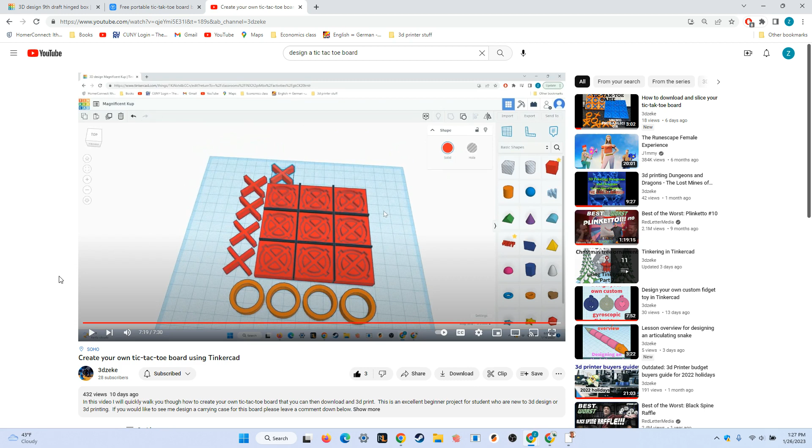Today I will be walking you through the design choices I made when designing my portable tic-tac-toe board. Unlike my first video, which was a step-by-step tutorial, this video will be more of an overview so that you can use it for your own purposes, but will still leave you with a challenge. With that said, let's get right into it.

The first thing that I did when designing this board was to simply remove 2mm from the bottom. This was to reduce the printing time as well as to save a bit of material.

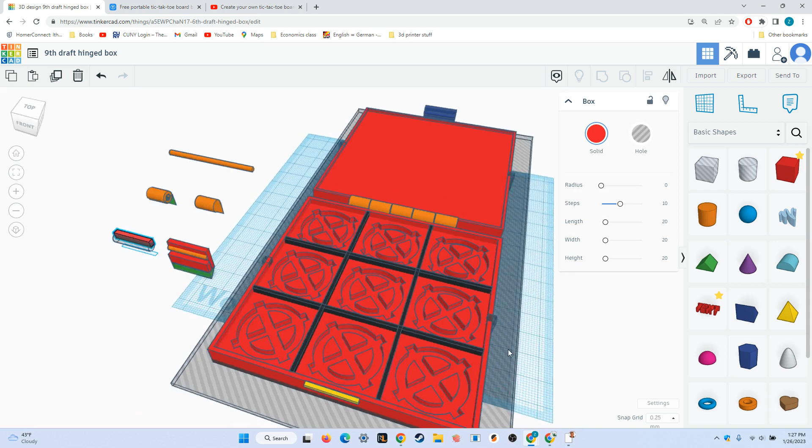After that, I added a lip to this box so that all the pieces would be held in place when the box was closed. This lip is also mirrored on the lid of the box. I also recessed the lid of the box a little bit, because the pieces jutted out of the bottom a little bit, and this was to give them room to do so.

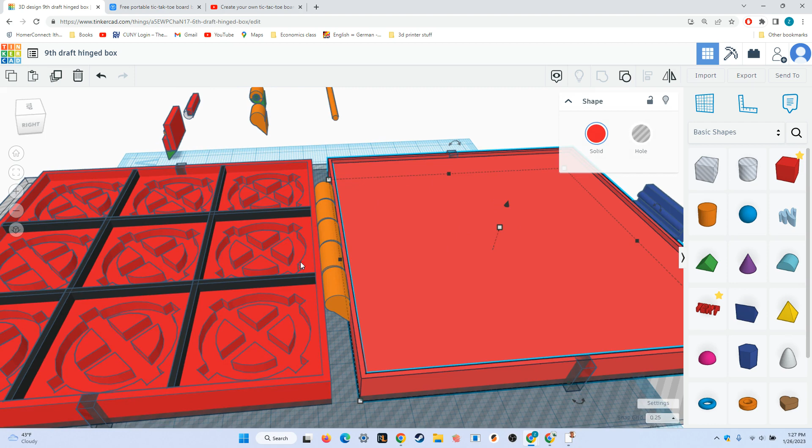After that, I began designing the hinges that the box would fold on. If I hide this hinge, you can see that some of these hinges are hollow, while other ones are solid. Both of these were designed very similarly, and if we go over here, we can take a look at how I made them and the basic shapes that make them up.

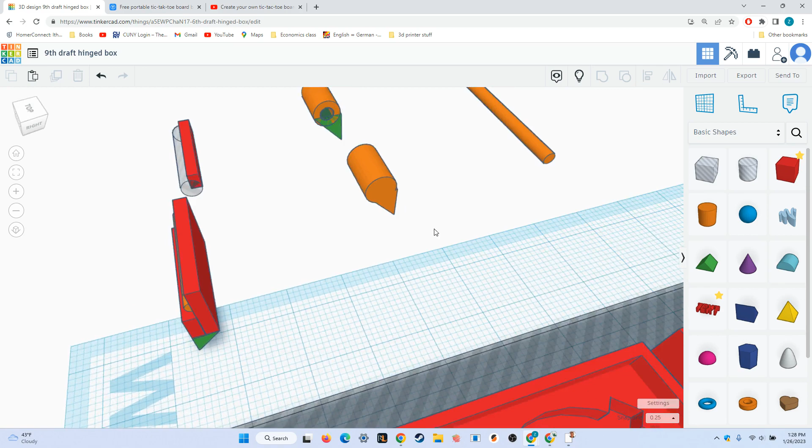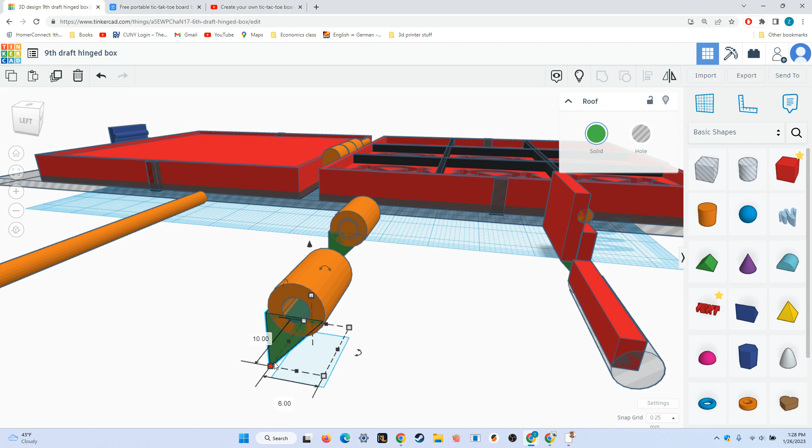So here we have the two leaves that I used when making my box, and the first thing I did was start off with a roof shape that I rotated. This was because I wanted this model to be printed in place, and this roof allows me to not have any overhangs that would complicate the print.

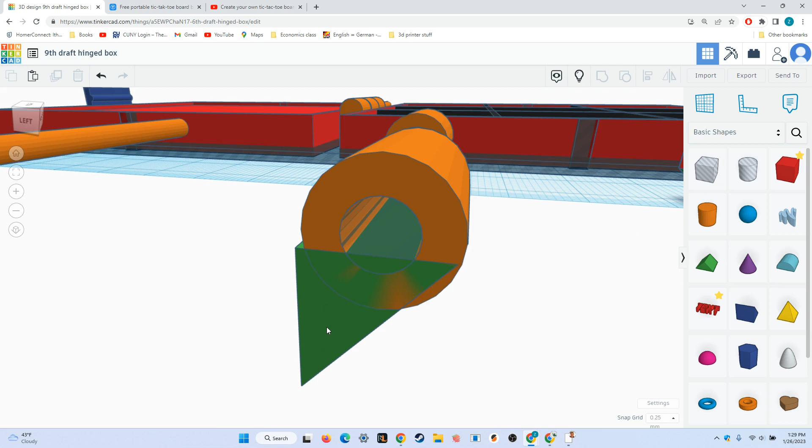The next shape that I dragged in was a tube, and the measurements I used for this were a radius of 3 and a wall thickness of 1.5. So from end to end it's 6mm in diameter, but the hollow tube in the middle has a diameter of 3. Now you can see that the roof and the tube overlap a little bit.

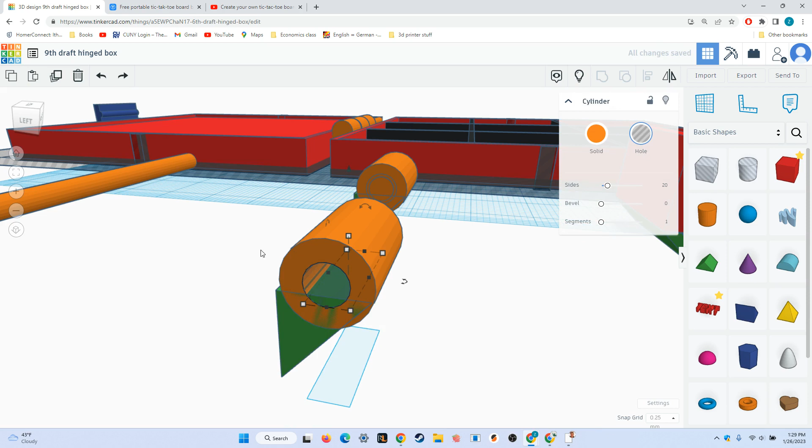This would be a problem as it would connect with the pin and prevent it from rotating. In order to solve this, I simply used a cylinder that I set to be a hole, with a diameter of 3, that fits right in the center. When I group them all together, we get the hollow leaf.

The other leaf that I used for this box was solid, and I accomplished this with these same shapes, but the cylinder wasn't a hole in the middle. I also made it a little bit larger because I could really.

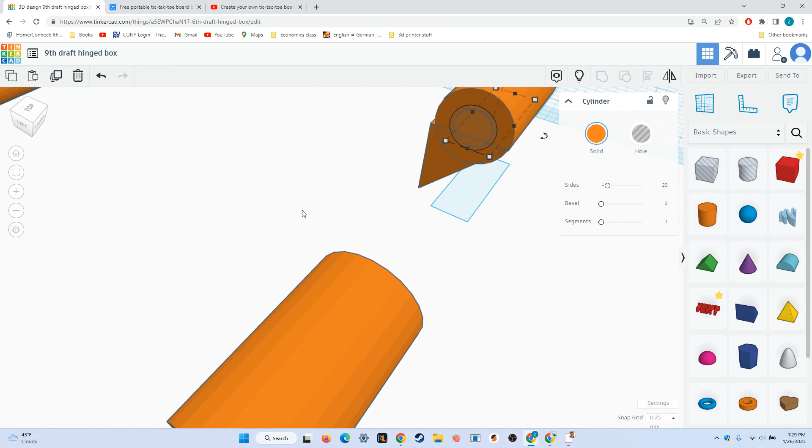The pin is over here, and as I said, the inner diameter of these leaves is 3mm, so the diameter of this pin is 2.4, so that there is room for it to rotate around, and the printer does not have to worry about too close of tolerances.

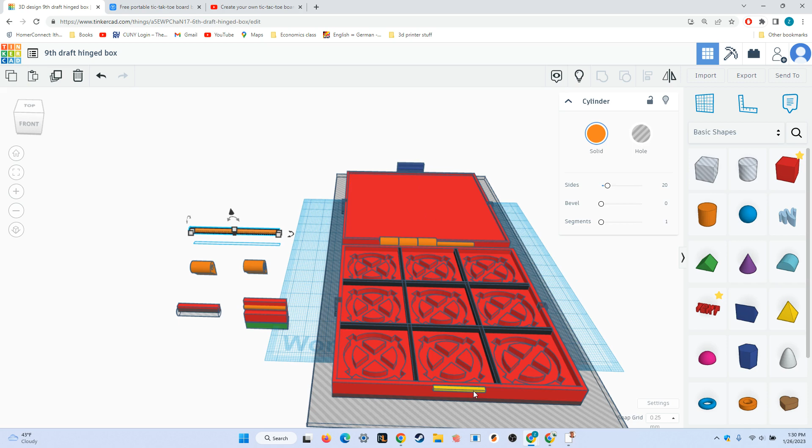The last pieces that I designed, and that took me the longest time to perfect, were this blue and yellow latch and lock. Once again, over here I have the basic pieces copied and pasted so you can see how I made them. To make the lock, I simply used a cylinder which I set to be a hole, as well as a box.

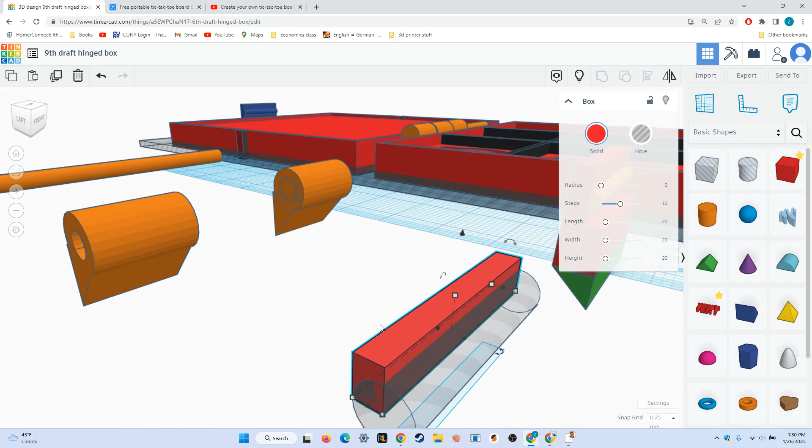On the other side we have a smaller cylinder. The reason why I elected to use cylinders was because I thought it would be easier to open and close the box with the rounded, smooth shape of a cylinder, as opposed to something like a roof, which would lock in place but would be very hard to open potentially.

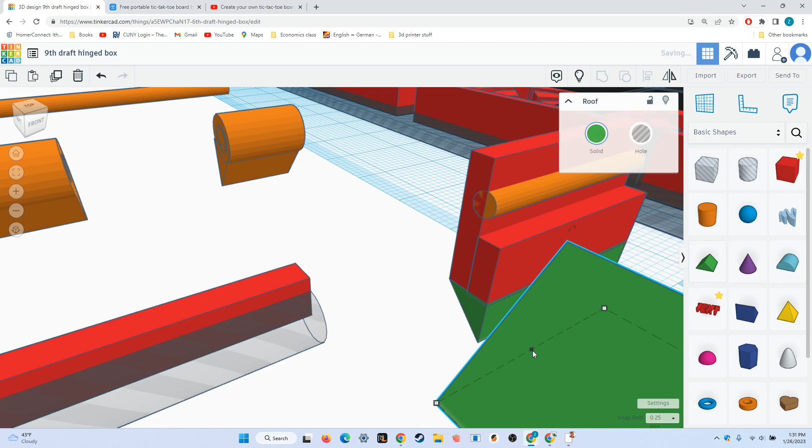The cylinder over here is twice as large as the locking cylinder, and this was because I wanted it to be easier to open, and it actually still closes quite tightly and needs a little bit of strength to open, which is perfect.

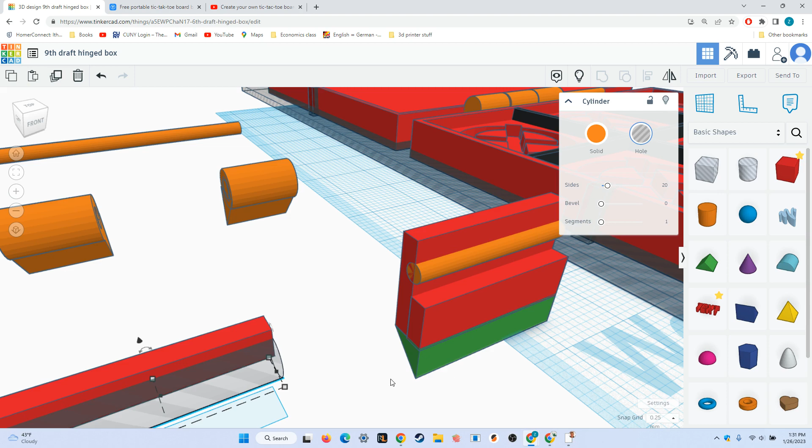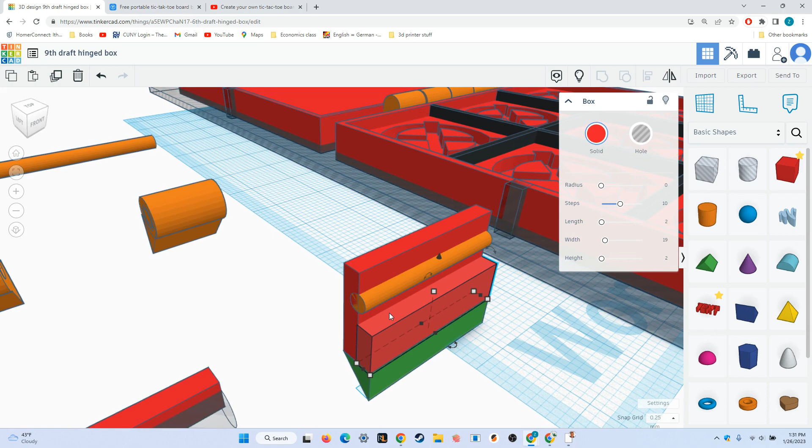Now, this locking piece over here was actually what gave me the most trouble. Once again, I have a roof on the bottom to avoid any overhangs, and I did not initially realize this, but this box here is to offset it from the lip. Without it, this piece would collide with that lip and you'd be unable to close the box effectively. So that is what that is for.

The last change I made in my design was adding these 4 grooves to the lid and bottom of my box. These are so if at any point this latch fails and breaks off, you could still use a rubber band to hold the box closed, and these grooves will stop the rubber band from rolling away or falling off.

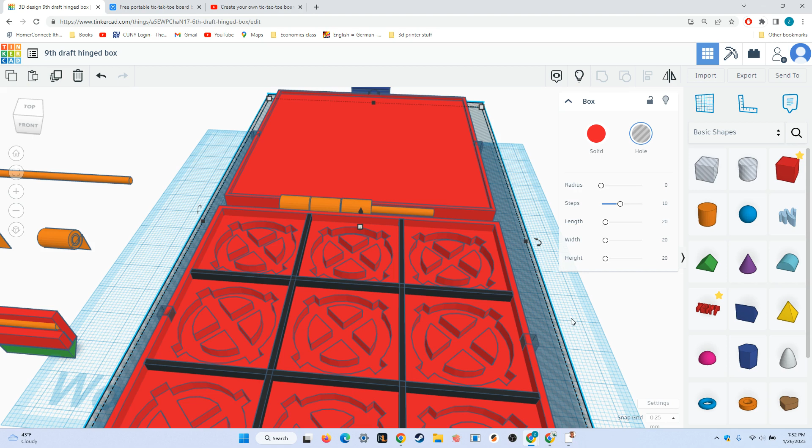And that's how I designed my 3D printable tic-tac-toe board. I hope that this video will help you to design your own, or if you are interested, you can simply download my copy from Thingiverse for free.